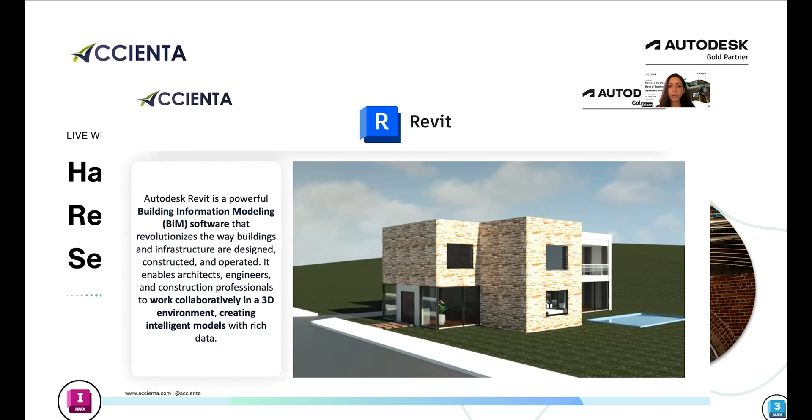On the right, we can see a render taken from the Revit software. We can see that the render communicates clearly what materials have been used, and it communicates the whole model in a clear vision. However, if we go next, please.

So it's a real-time visualization software. Let's wrap it all up. The purpose of Revit is to create basic renders, plans, and models, and Twinmotion is only for the visualization part.

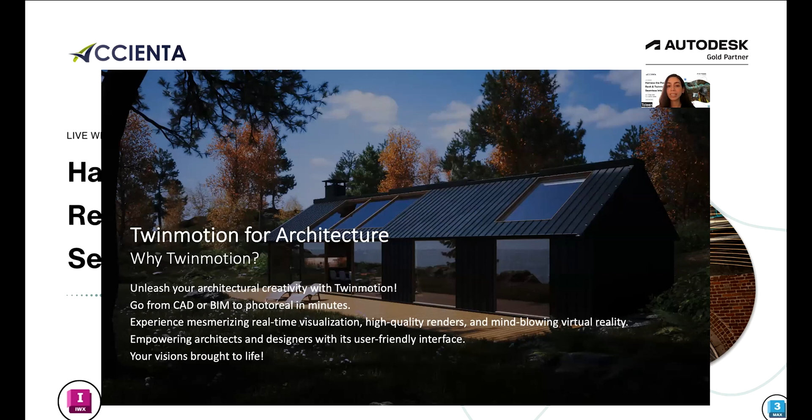So why use Twinmotion? You can go from CAD or BIM to photoreal in minutes. With Twinmotion, you can clearly communicate your ideas, respond to feedback on the fly, and enable every stakeholder to experience your design's full potential before a single brick is laid.

After that being said, let's put it into more simple words. Basically, why use Twinmotion? You can aggregate, iterate, communicate, and then you can bring your scene to life, put it all in context so you can share your vision.

So how can we aggregate, iterate, communicate? We can aggregate data because Twinmotion seamlessly integrates Revit's architectural and structural data, enabling comprehensive visualization. We can iterate seamlessly because real-time changes in Revit instantly appear in Twinmotion, supporting efficient design iterations. And it's not a two-way change process. Whatever you change in Revit is automatically changed in Twinmotion, but the opposite is not correct.

And lastly, effective communication. You can communicate effectively through instant visualization because it enhances collaboration and communicates design intent effectively.

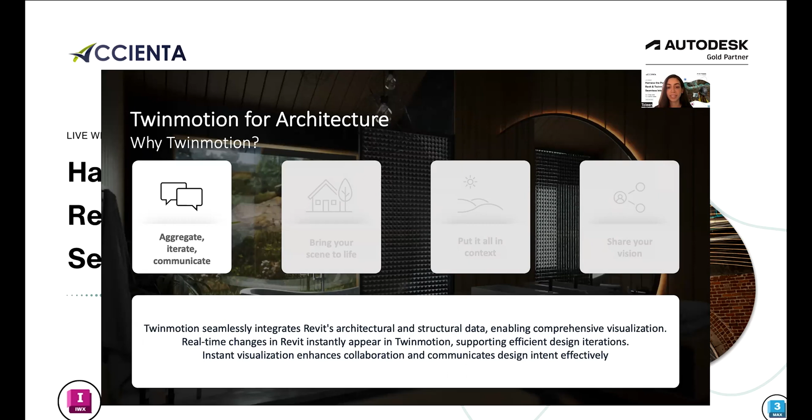Now, how can we bring our scenes to life? You can bring your scenes to life through realistic environments because Twinmotion's advanced rendering capabilities transform your Revit models into real-life scenes with accurate lighting, material, and environmental effects. You could also add animated elements such as animated people, vehicles, and nature to create dynamic scenes that illustrate your design in action.

And lastly, immersive walkthroughs. You can navigate your design as if you were physically present, providing a tangible sense of space and functionality.

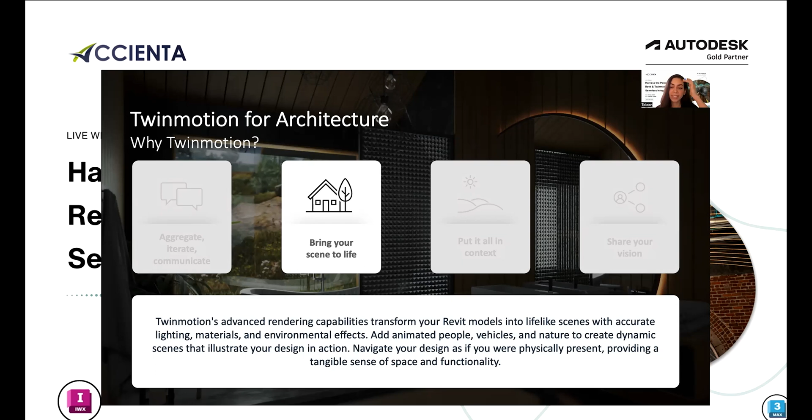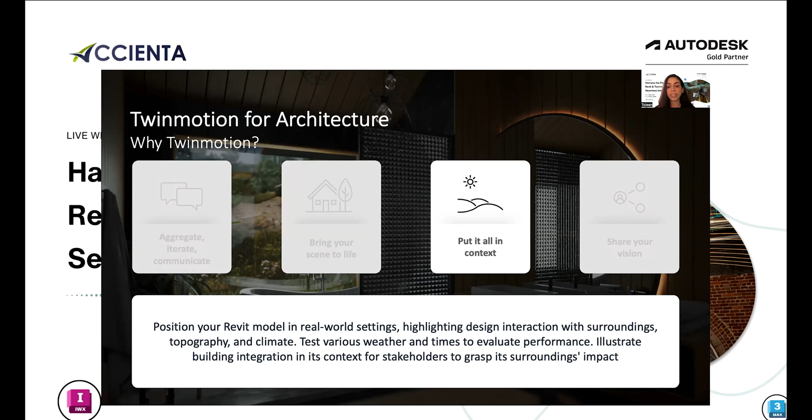Now, after that, we brought our scene to life. We can put it all in context. How can we do that? We can do that through putting our model in the environmental context. You can position your Revit model in a real-world setting, highlighting design interaction with the surroundings, topography, and climate as well. You can also test various weather and times to evaluate performance. And lastly, site integration. You can illustrate building integration in its context for stakeholders to grasp its surroundings' impact.

After doing all of that, we are ready to share our vision through compelling presentations, using our storytelling tools, and making an interactive experience. So basically, you can use Twinmotion for engaging presentations and animations to captivate clients and stakeholders, guide viewers through design features and innovations, and enable real-time interaction for deeper understanding and valuable feedback.

Now, just a quick overview. This is a more summarized key features. So basically we can aggregate data, iterate seamlessly, communicate effectively, create realistic environments, add animated elements, enable immersive walkthroughs, establish environmental context, simulate weather and time, achieve site integration, deliver compelling presentations with storytelling tools, and provide interactive experience.

And this is not everything. There are way more options in Twinmotion.

So basically, Twinmotion offers one-click synchronization with various software, and you have the ability to import entire scenes from various software as well in a new Datasmith format. You could also bring in data from virtually all 3D content creation programs with support for importing many extensions such as SKP, 3DS, and so on.

You can import point cloud data. You can have different outputs such as panoramas, standard, or 360 VR videos, which is really important for our times today. And lastly, different platforms and software inputs.

Now, what is the relationship between the AEC collection and Twinmotion? So there's a direct link between Revit and Twinmotion. And as we all know, there's a direct link between FormIt Pro and Revit.

But that's not the only software that has a direct link or has a link with Twinmotion. You can link your InfraWorks, your 3DS Max, and Navisworks by importing them or extracting them as an FBX extension, and that's how you can link it to Twinmotion.

How about AutoCAD, Civil 3D, and other software? You can save them as DWG and various other extensions, and then import them into Navisworks. Navisworks can be saved as FBX as well and imported into Twinmotion.

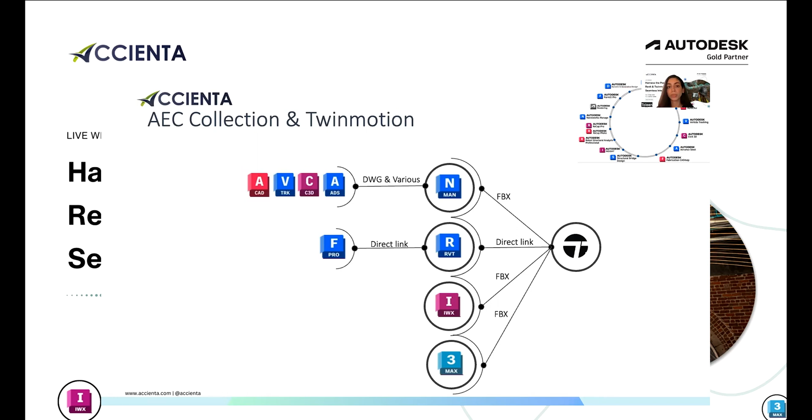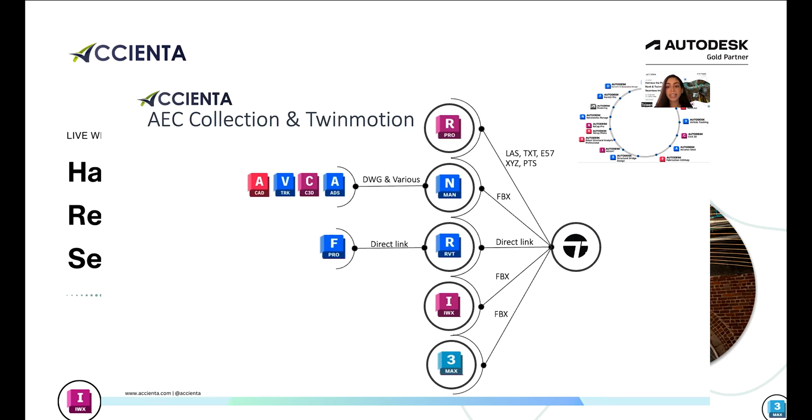Lastly is Recap Pro. Recap Pro can be saved as LAS, TXT, and many more extensions that can be imported to Twinmotion as well.

So let's take everything in. Don't be overwhelmed with the information. We will show you through the technical demo how you can easily achieve a realistic, stunning model.

I created this model myself from scratch, so we can work together to understand how we can link our Revit model to Twinmotion, how we can make this model more realistic, how we can add more details, and so on. So for the first video, we're going to learn how to link our Revit model to Twinmotion and what AutoSync is. Can you start the video?

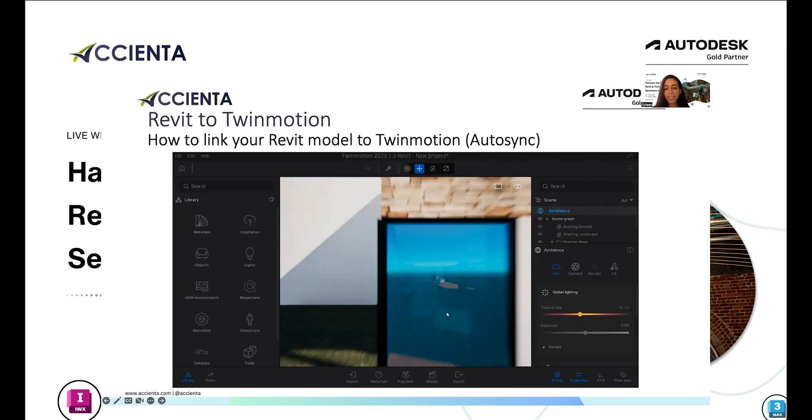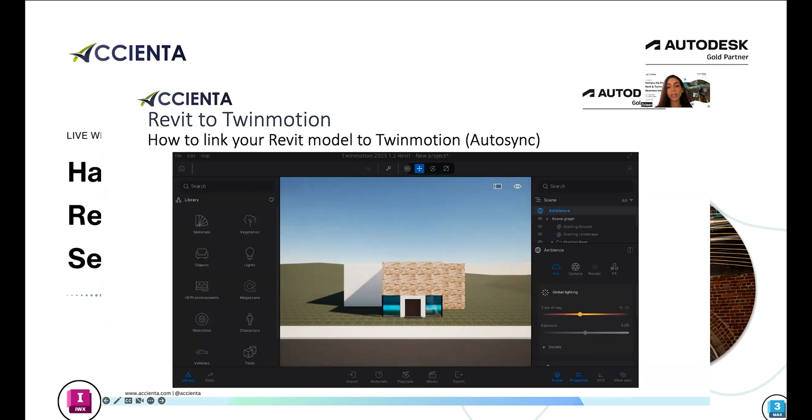So I'm pretty sure you're now saying that it's not realistic yet. You can see here the surroundings, the interiors, the exteriors, everything. We still don't feel that it's realistic enough. That's fine. The more details we put, the more elements we put, the more realistic it will look. So now that's how it looks when we firstly import it into Twinmotion. We can change it together so it could look more realistic. Next, please.

Great. Now, what is the difference between Revit and Twinmotion, such as the trees? As I told you before, there's this button called AutoSync. Whenever you change anything in Revit, it's automatically added to Twinmotion. And whatever you change in Twinmotion is not changed in Revit. It's not a two-way change process.

So what we're going to do now is add a tree in Revit, and let's see how it looks in Twinmotion, and how we can change that to put a tree from Twinmotion itself to give it a more realistic look. Now, here we're going to navigate between the two windows. The window of Revit is on the left and the window of Twinmotion is on the right. Can you start the video, please?

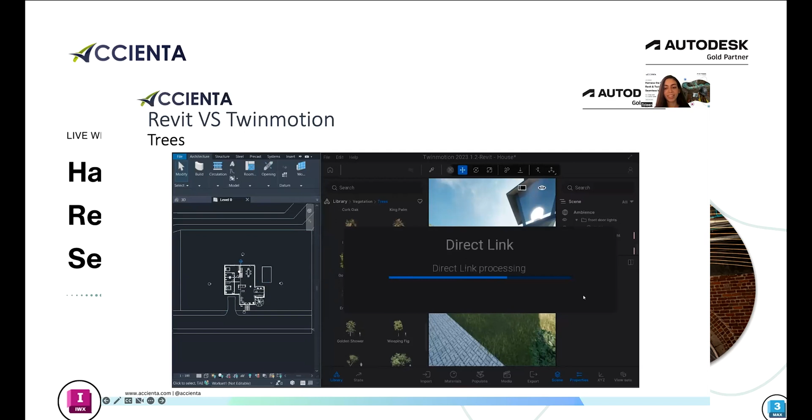So I'm just going to go to Revit, add a component, which is the tree, and add it right there. After that, I'm going to go to Twinmotion, and let's see the magic happen. It's going to be automatically added, and we can see how harsh and unrealistic the tree looks. What we're going to do is just right-click, and then replace it. Choose from any tree you'd like and just drop it in the box, and you can start the replacement. And just like that, you have yourself a more realistic tree. Next, please.

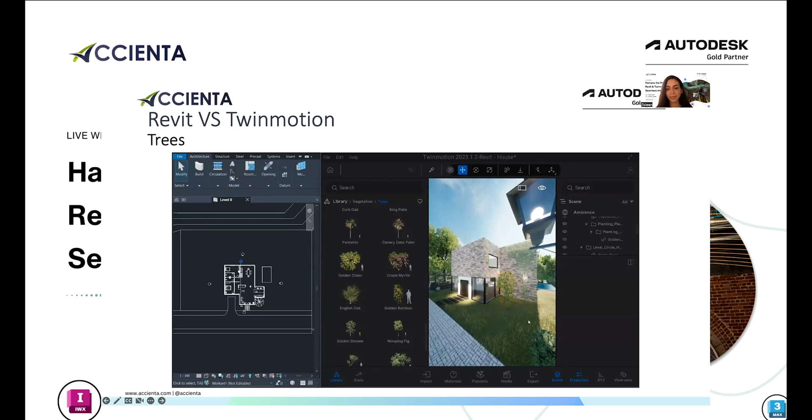Now, after seeing how we can import our Revit model into Twinmotion, let's see how we can make it more realistic. So for now, the exterior is imported directly from Revit. It's stone. Now, I'm going to zoom in and zoom out just to show you the differences between the materials in Revit and in Twinmotion, and how it differs in extrusion, roughness, and so on. So now we're going to learn how to customize the materials, the colors, and what the material picker is. Start, please.

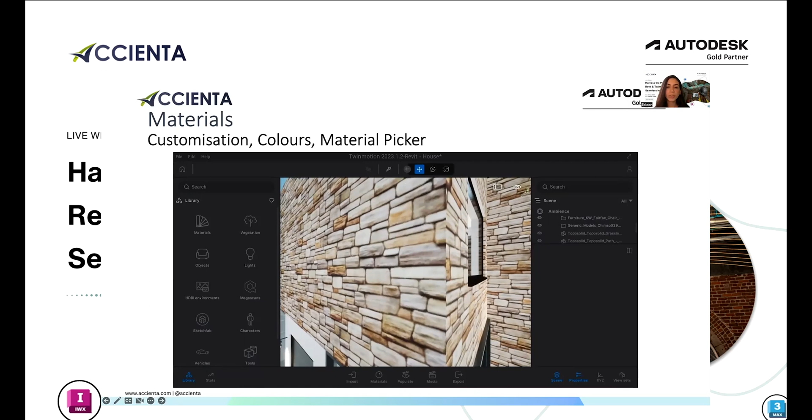So I'm zooming in. You can see now that there is no extrusion, no roughness. You can see that it's a flat picture. We can't see more than that. Let's change it. So on the left, we have our library. I'm just going to go to materials. You have glass, metal, wood, brick. You can choose from whatever you want. I'm going to stick with stone.

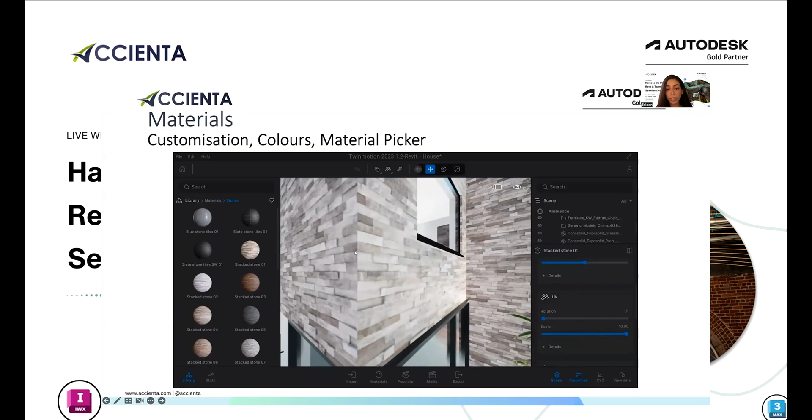Now, Twinmotion has more than one library. You can choose from these on the left, and you can see all the swatches here. On the right, you can change the scale, the roughness. I'm just going to scroll a bit more and choose what I like better. I'm going to stick with this one, and then we're going to zoom in. You can see that the material has its own shadows, the roughness, and you can see all of the extrusions as realistic as it is.

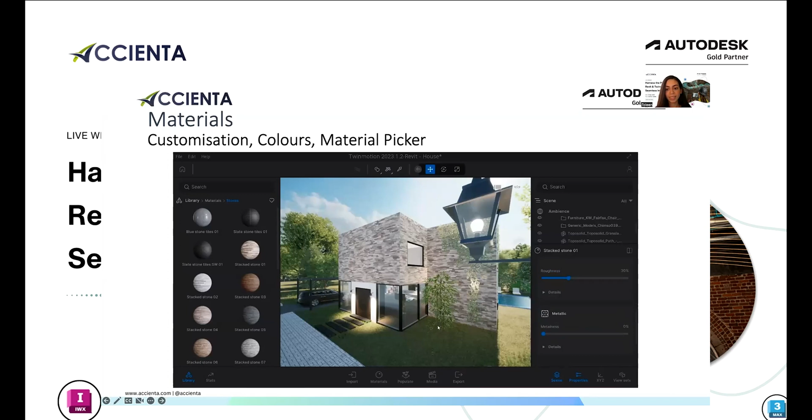You can change also the metallic feature of it. You can make it more reflective. It's fully customizable to your own needs and desires.

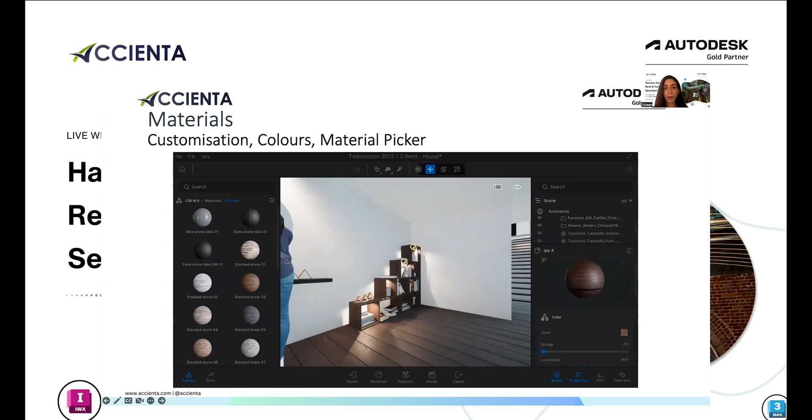As simple as that. So as I was telling you earlier, Twinmotion has more than one library, more than one extension. I'm going to show you that in a bit. So let's move to the next video.

Now, on the left, you can see the library. We have also Megascans and Sketchfab. What are these? These are other libraries that Twinmotion acquired earlier. There are more options for you. If you'd like, you can just use the library that Twinmotion has, or you can use Megascans and Sketchfab.

So what we're going to do here is learn about object dropping, vegetation, how you can change the age, scatter, people, plus path. What are these? Let's learn more. So now let's start the video.

I have my camera positioned in the street, and now I'm going to add a tree from library, vegetation, trees. You can see all the swatches here, illustrating the age difference and the size. You can choose from whatever tree you'd like and just throw it wherever you want.

So I'm just going to change the camera a little bit so we can see how we can change it. We have our tree right here. You can move it from the icon that is there. And I'm changing the age, making it younger, older. And of course, the size differs with the age.

And something really cool is that you can change the season as well. If you'd like, you can keep it automatic, so when you change the whole season, it changes with it. You can choose from the options: autumn, winter, of course the leaves are lost in winter, or you can simply change the tint of the leaves. Here, I'm just going to pick a color, a more orangey color, let's say.

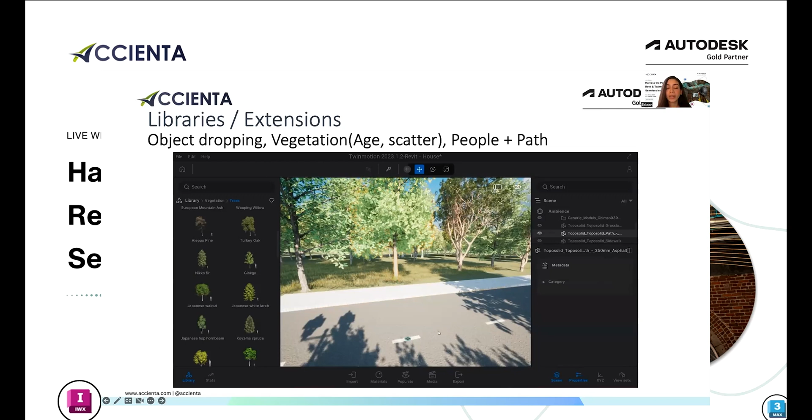And just like that, we have our tree ready, but I'm just going to get it back to its original color. As simple as that, you had your tree, it's in the right place, and then let's add some other objects.

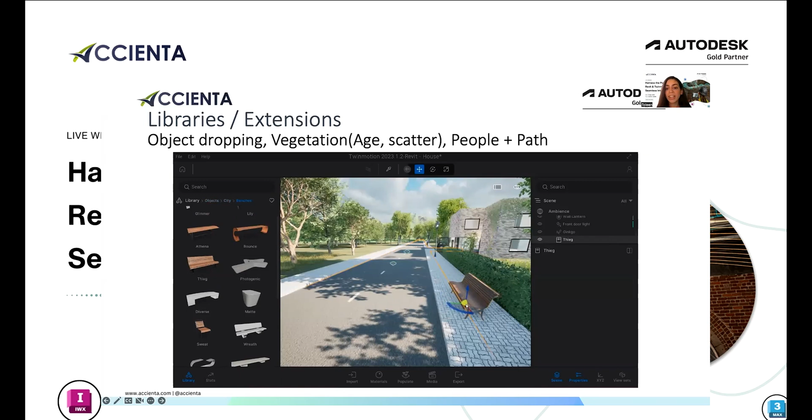So now I'm going to add a bench to make this street more realistic. From objects, city, benches, and you have your bench ready. I'm just going to choose from one of these, see the options, and just throw it in. And you can change it, change the position from the icon there. I'm going to add a little bit more elements so it looks more realistic.

Now, as you can see, the library is separated in a matter that you can easily navigate between the features and so on.

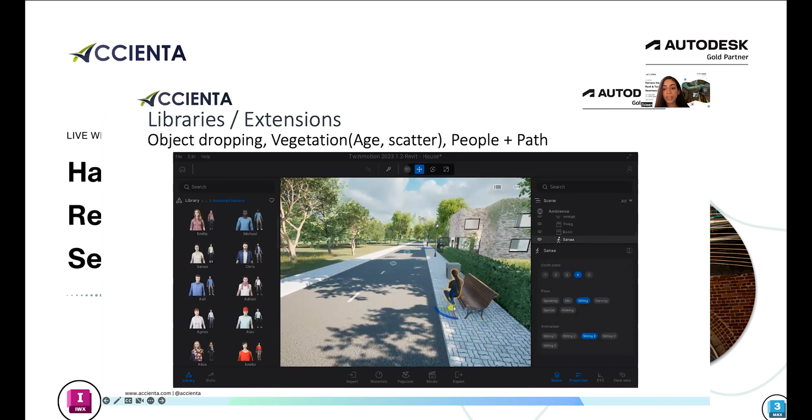So now I'm going to add my person. You can add an animated person or a posing person. I'm just going to choose this lady right here. And something really cool as well is that you can change her clothing, you can change her pose: sitting, dancing, walking, and there's also more than one sitting position as well.

So just like that, we have our animated person, our bench, and many other elements. So what we're going to do now is add some pedestrians and vehicles as well.

It's really simple. From populate, you just go to path, character, and then just press on the starting point and on the end point. And just like that, you have your pedestrians.

Now, you can choose whether you want them dressed as if they're in an office, or traveling, or on the beach, however you want. You can change the width of the path, the density, if you want more or less people, and as I told you, the clothing.

It's really interactive and fun to work with as well. I'm just going to leave it as the street.

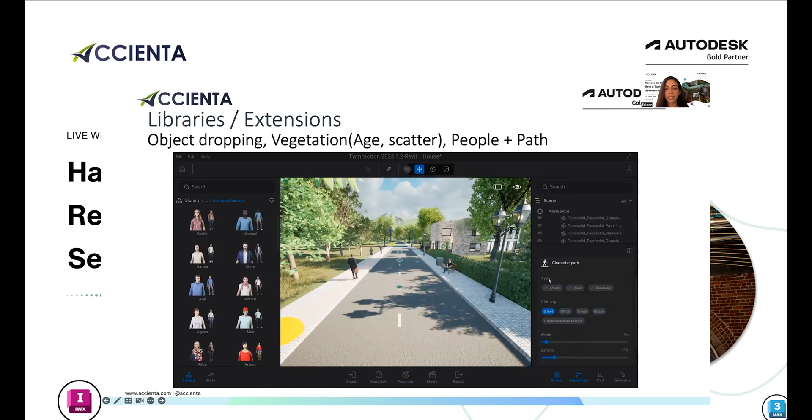Now let's add our vehicles. Again, from populate, vehicles, add the starting point, the end point, and you're good to go. So it's really simple to add all of these paths and all of these vehicles and so on.

Here we can change the lane count if you want it to be more than one, or if you want it to be a two-way direction, you can do that. Now you can change the lane count, but it's way too much for my street right here. So I'm just going to keep it one, and turn off the two-way direction because I want to customize it the way that I want.

And of course, you can change the density, the speed. It's a residential area, so we're just going to stick with slower cars. And I'm just going to do the same thing on the other side.

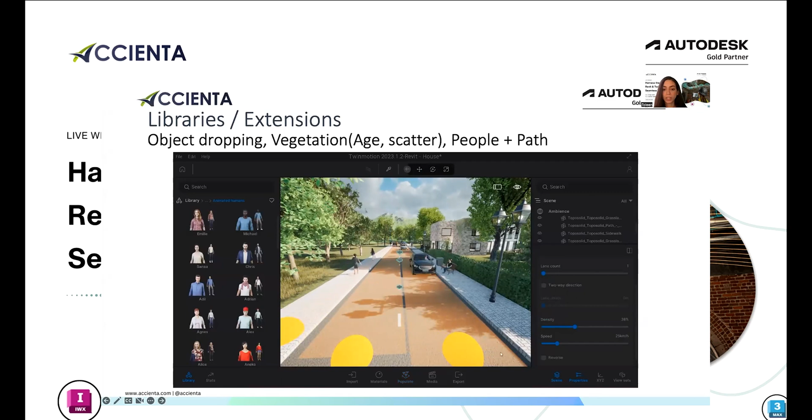And you can do this or just simply press on a two-way direction. So as simple as that, you can change the density, the speed as well. You have your street ready for your model.

That's it. I'm just going to change the perspective a little bit so you can see it from all perspectives. We can move around, and you can see how it looks from the top, from the sides. That's a very, very cool feature, actually.

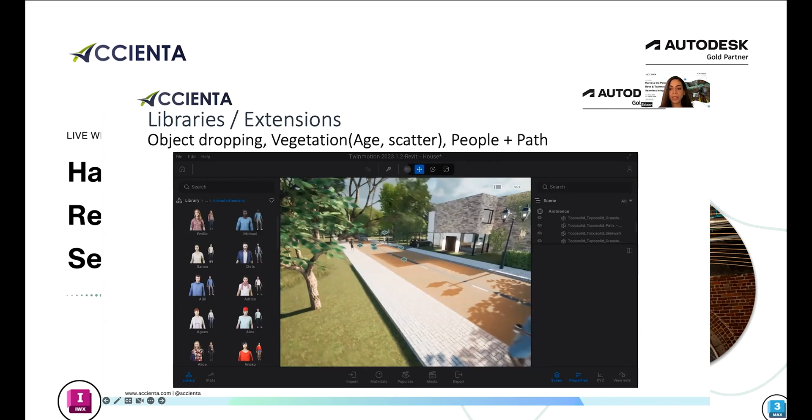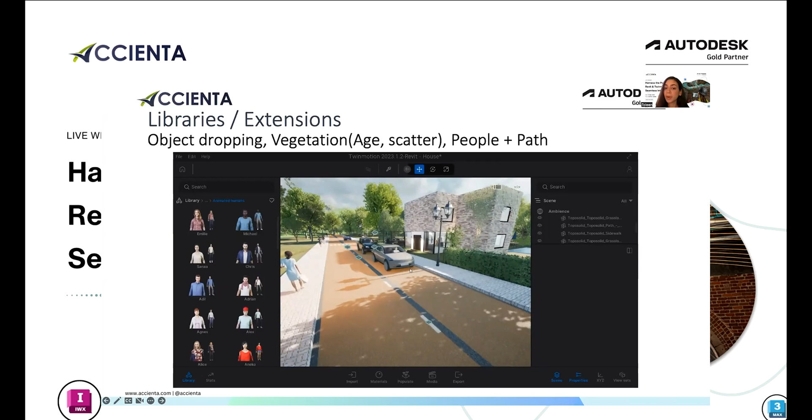So after that, we're done with that. We learned about the libraries, the extensions, how can we drop an object, the vegetation, the paths. Let's move on. Next, please.

Now we're going to talk about how you can touch up your render. We all know that lighting brings your scene to life, and one of the most important features in Twinmotion is the lighting. You can customize it as much as you want and so on.

So here I chose that let's build a bedroom together. Now it will be an empty room, and we're going to put all of the elements inside to make it look as realistic, as homey, as relatable as possible. So now we're going to create this bedroom and add the lighting to it and see how the lighting makes your room differ and more lively.

Let's start the video. I'm just going to enter the room. Now it's an empty room. We can see a window over there. I'm just looking around, and I'm going to add my bed first.

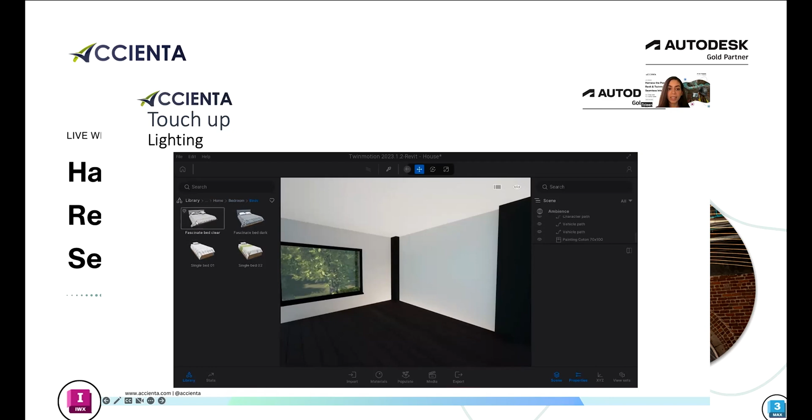First we go to library, objects, home, bedroom, and choose a bed from these. Or you can simply type in a bed and you'll get more options from the other libraries as well. I'm just going to stick with this one.

And if you don't like the blanket or any element from the object that you have, it's fine, you can change that. So I'm going to change it from materials, go down to fabrics and just look around. You can see the swatches, it makes your life easier.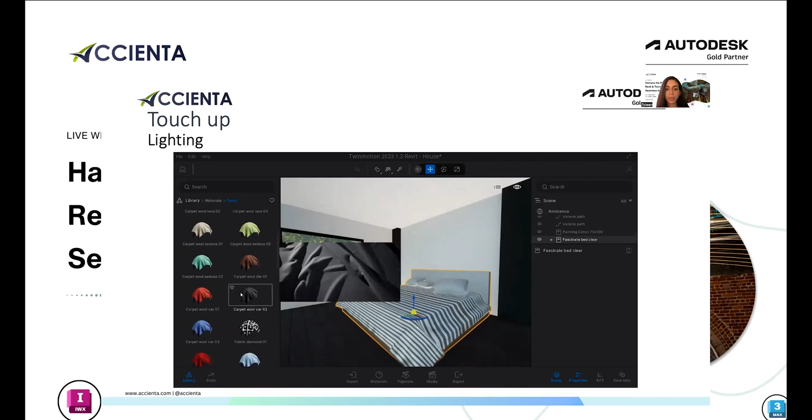So let's try putting a black blanket and just changing the color of it. You can make it darker, lighter. And there it is. Or you can simply just add a pre-made material.

And you could also change other elements from the object itself. So here I'm just changing the pillow colors, all of the pillows. You can also change the wood, and you can change anything in the objects that you have chosen.

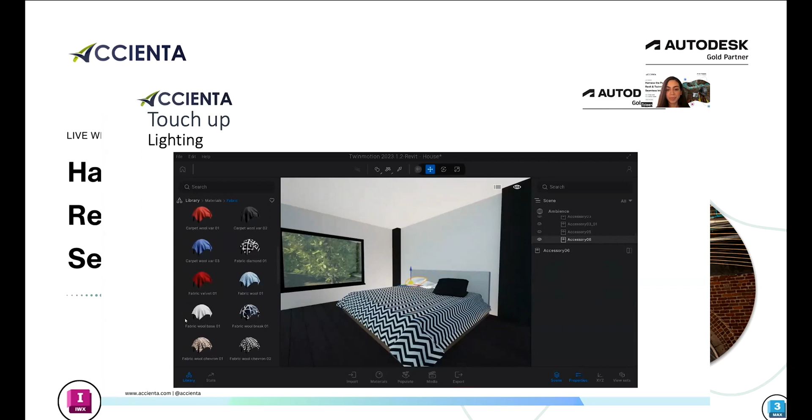After that I'm done, I'm just going to add a little storage area, a little wardrobe. I'm going to go back to library, objects, home, bedroom, and just choose a wardrobe.

Now here I'm going to zoom in. I want to show you the level of details. So this is an actual phone, and also you can see the reflections of the glass. It's really cool.

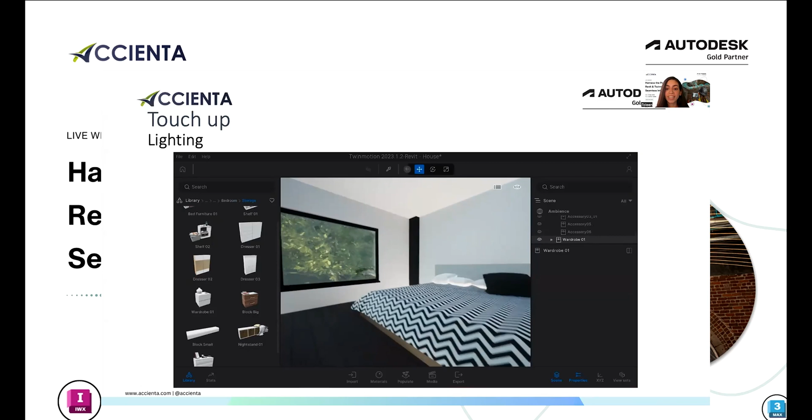Now I'm going to add a lighting fixture. I'm just going to go to Home, Living Room, Lamps, and choose one of the lighting fixtures. You can rotate it, move it, until you're pleased with it.

Afterwards, I'm going to add a mirror. I'm just going to look around to make sure everything's okay, and then add a mirror. So now you can type in mirror, you will have more options if you type it in, or you can just simply navigate through the library itself. I'm going to choose one of the mirrors and change the dimensions of it.

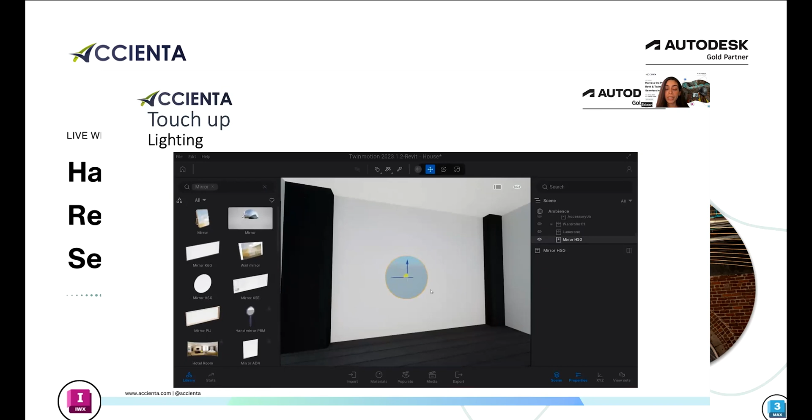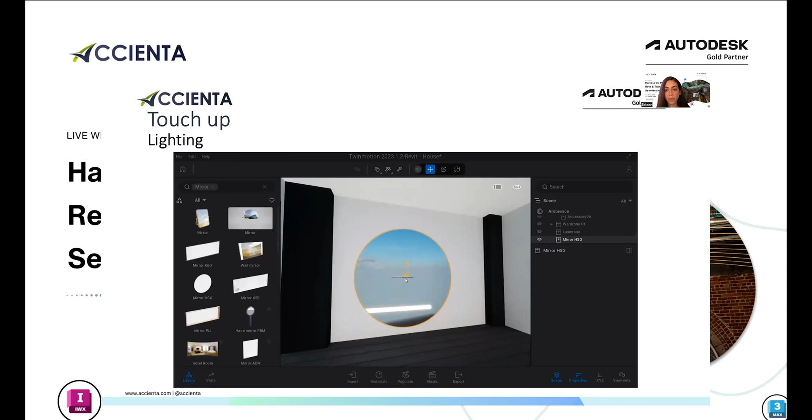What you can do is press on the scale to change the height, the width, or simply make it larger or smaller without changing the actual parameters of the object. I'm just going to move it around and keep it in the middle.

Now I want to add my lighting to make the room more lively, more relatable, more realistic. So we're going to go from library, lights, and choose any lighting you want. I'm going to add an omnidirectional light, go with this one, and just drop it. You can move it around and customize it to your own needs.

You can change the intensity, how far the lighting can go, and the temperature of the light. You can make it colder, warmer, and change the color of it as well.

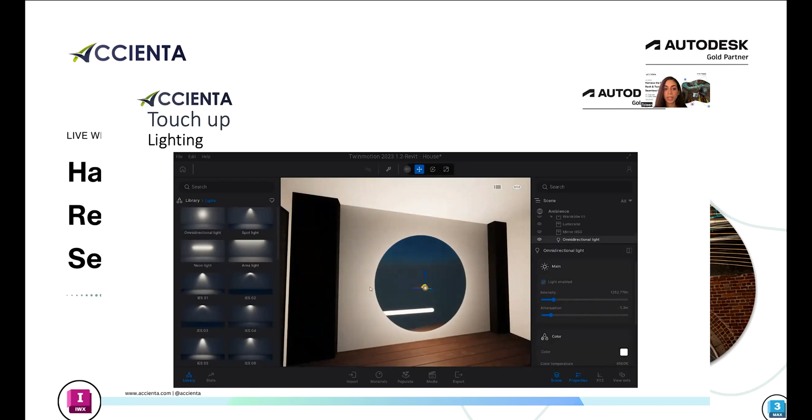After you're pleased with the light, you can move on to add another element. I'm going to add another light to my lighting fixture. You can see it's starting to look more realistic just by adding the lighting. I'm going to add this one, move it around, and put it in the middle of your object so it looks as realistic as possible.

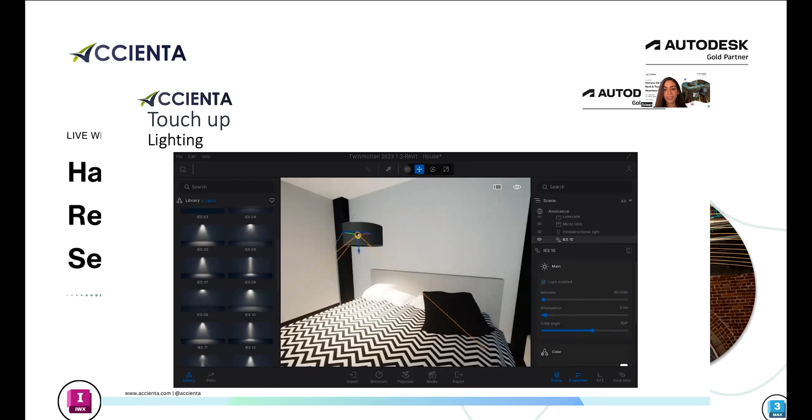As I told you before, we can change the intensity, how far it goes, and the cone angle as well, until you're pleased with it. So I'm just going to look around and show you how amazing the light can change the room.

Now let's add a little bit of plants. If you want outdoorsy plants, go to vegetation. From home, living room, plants, you can find the indoor ones. You can simply type in plant, or look for it in the library itself.

So I'm just going to add a couple here. You can see how the plant is reflected from the mirror, which is also really cool.

Just to finish up this bedroom, I'm going to add a little bit of decoration. Let's look around and see what's missing. We can add the decoration or the frame on this wall. I'm going to go to living room, decorations, and that's it.

Within a few minutes, you have yourself a very realistic room, a very homey bedroom, and you're good to go. It literally took just 5 minutes, and we have this beautiful bedroom over here. Of course, the more elements and details you put into your model, the more realistic it will look. So let's move on.

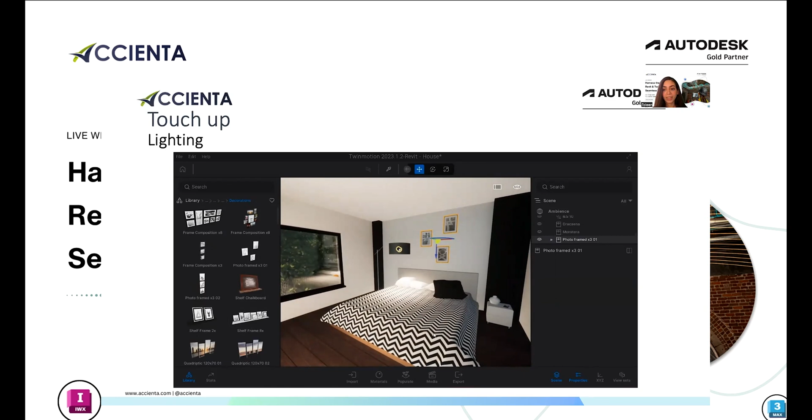Now, lastly, I want to talk about the output. What are the scenes? How can we render? How can we change the weather, the time of day, the background? When we're done, I'm going to show you a walkthrough of the whole project, the whole model, so you can see the level of detailing and how realistic it looks.

So here we can see that I have a perspective of the pool. Now, Twinmotion is more of a camera. You can play with the focal length, play with the perspective, orbit around, and look around. So you can choose whatever perspective or view you like.

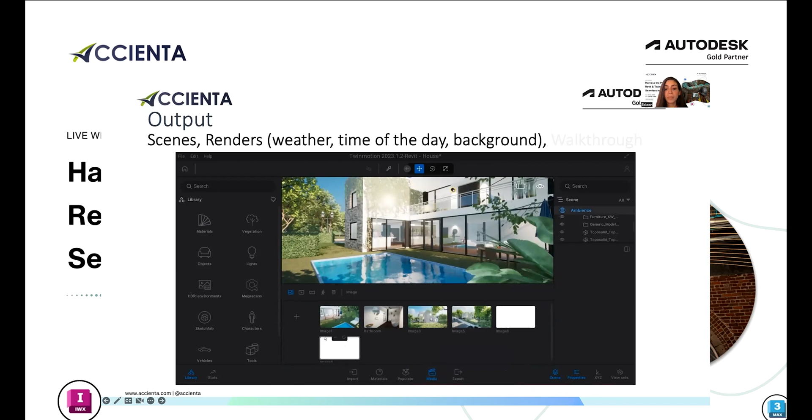Now, what I'm going to do is move a little bit until I like the view of it. And I'm going to go to media. Now, how do you render? You go to media and take a shot.

Now, here I have shots that have been taken before. They're considered as views, as saved views, just as in Revit. And you can change it around from the right.

So basically, you can change the weather. Now, this is sunny weather. I'm going to make it a little bit rainy. You can see how cool it is because even the ground is wet. Everything is changing with the weather itself.

And now I'm going to change the season. So now it's summery. Now it's autumn. You can see how the leaves are changing as well, the vegetation. Everything is subjected to the season.

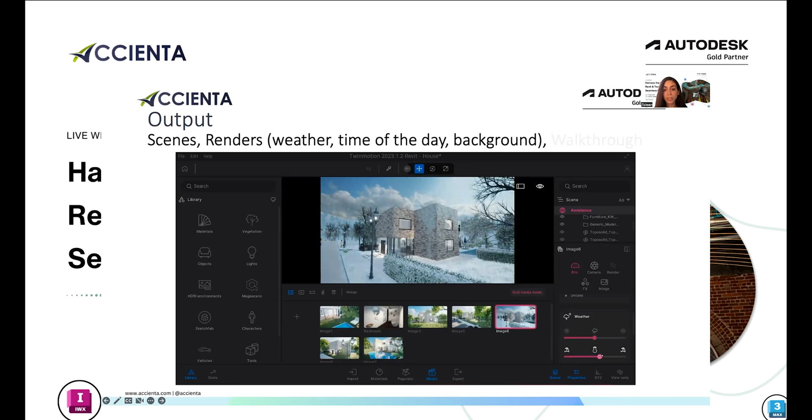Back to summer, back to sunny. Now you can change more than this, these functions.

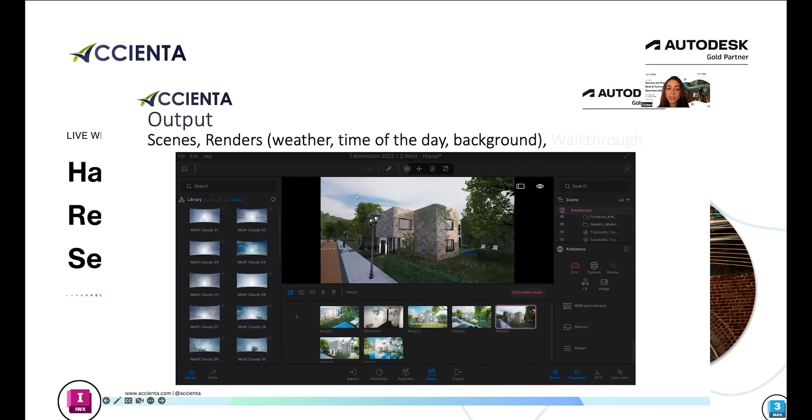Now there's an HDRI environment. What does that mean? It's basically you play with the whole shadowing. You can go choose whatever you want. I'm going to choose an approaching storm. You can see how the shadows change, how the lighting changed. Or you can just simply choose low sun, morning, afternoon, cloudy, clear, overcast. You can navigate through and choose your favorite. Now, look how the shadows changed.

Because I have an HDRI environment, that doesn't allow me to change the time of the day, but you can simply just turn it off, and now you can change the time of the day.

There is also a cool feature, which is the ocean. If your project was nearby an ocean, you can simply just click on that, and you have yourself an ocean for yourself. You can change the sun intensity, the sun size, the sun reflection as well.

And that's not everything. You can change much more than that. You can go to camera. You can change the exposure as well. Now, let's go to camera. What is camera? As I told you before, Twinmotion is more of a camera. So you can change the focal length, like 16 millimeters, 20 millimeters,

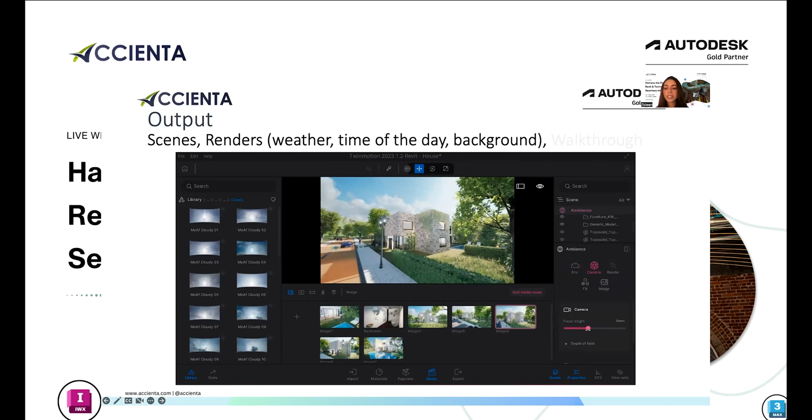Whatever suits you best. You can go to render. From render, you can choose the intensity of the shadows. If you want to make it lighter, darker, more intense, less intense, you can see the difference right here. You can color grade it, the saturation, the contrast, and finally, you can choose how you want to extract this image, the format of it, and the size, of course.

So that's basically it of how we can render the scenes. As simple as that. It's what's very nice about Twinmotion, that it's very user-friendly, it's very direct, it's very easy to use as well.

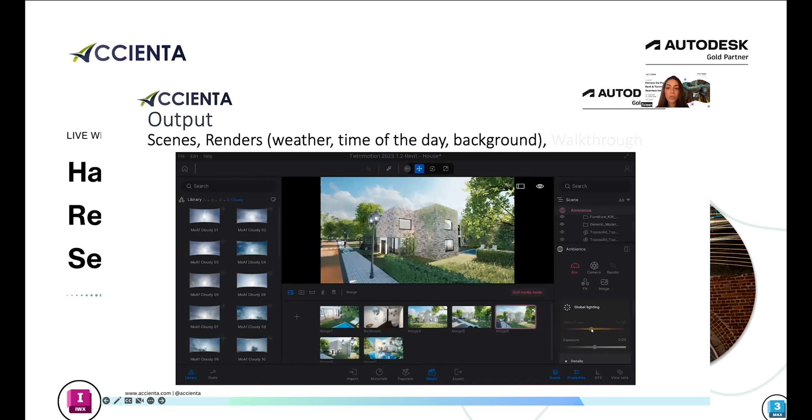Now, lastly, I want to show you the walkthrough. Through the walkthrough, you're going to see all of the elements. I'm going to change the times of the day. I'm going to change the weather as well. You can see how you can position your camera in certain positions, make your own perspectives, make your own video, and add your own elements. So let's start the video.

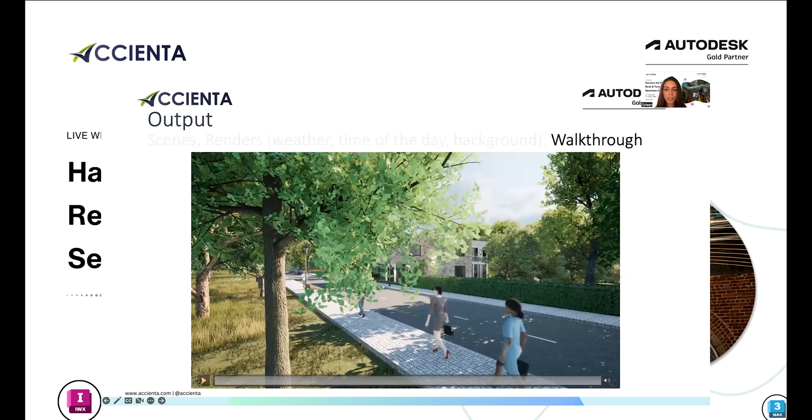You can see how we're moving around. I believe it's a little bit lagging because of the internet, but once you save it to your computer, none of that will happen.

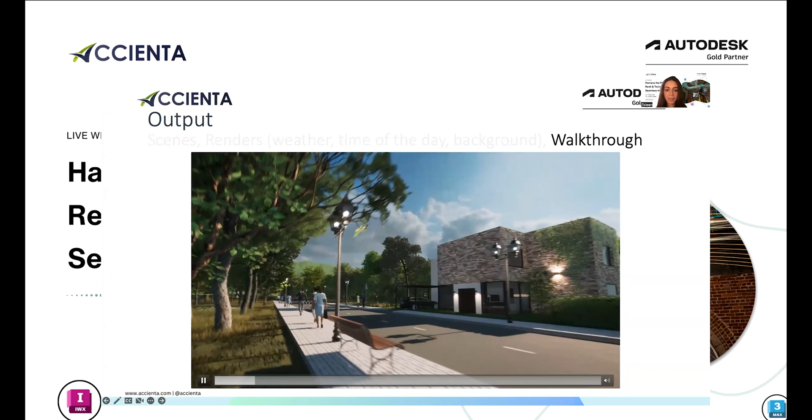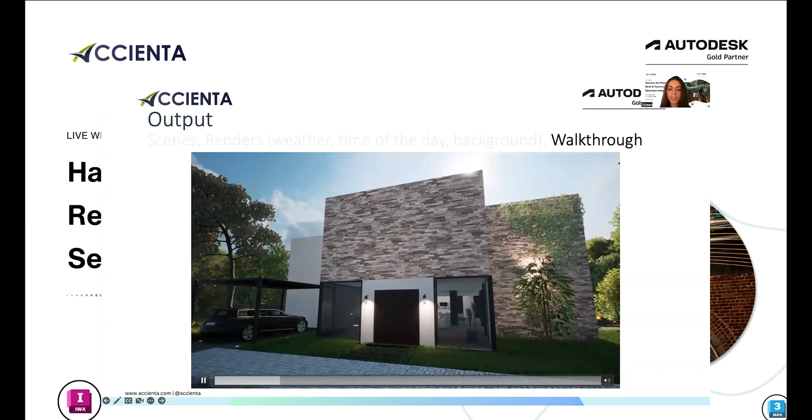So we can move around. Let's see the exterior of the house, the interior. You can see all of these elements on the street, the sidewalk, the little dash lines, the signs, the vegetation, the cars, the people moving, here the lighting.

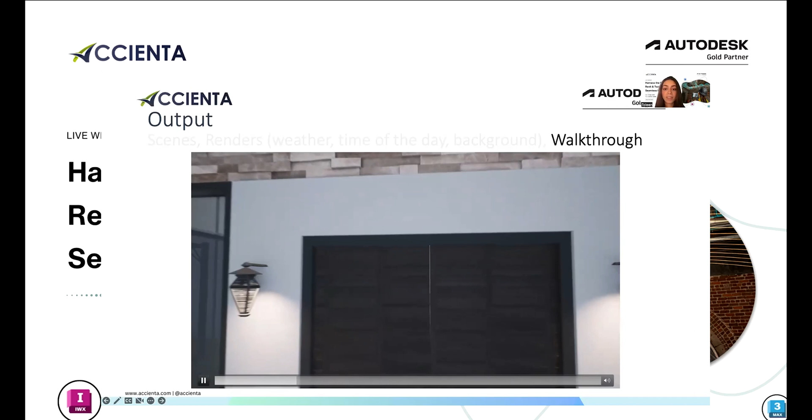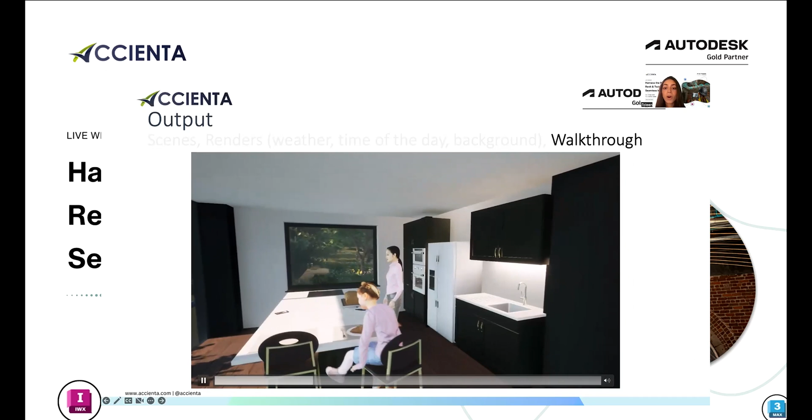And let's see also the interior of the house as well, the level of detailing that was put into Twinmotion. So here we're entering the house. We have our animated people, we have our kitchen. Now, all of these objects have been used from Twinmotion. I have changed the color of them, the materials, but we can see how wide the library is.

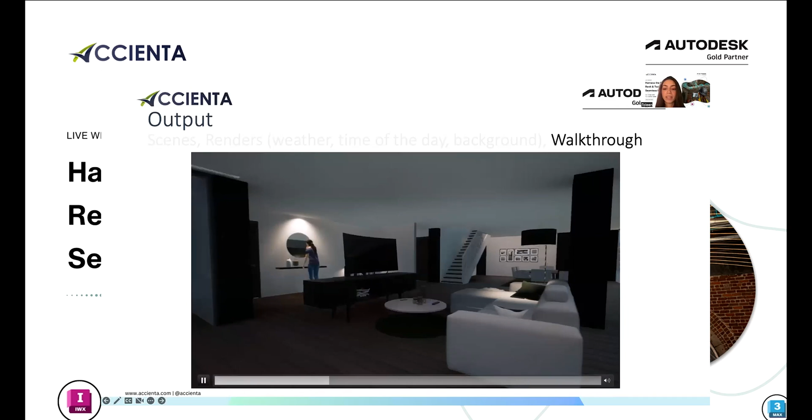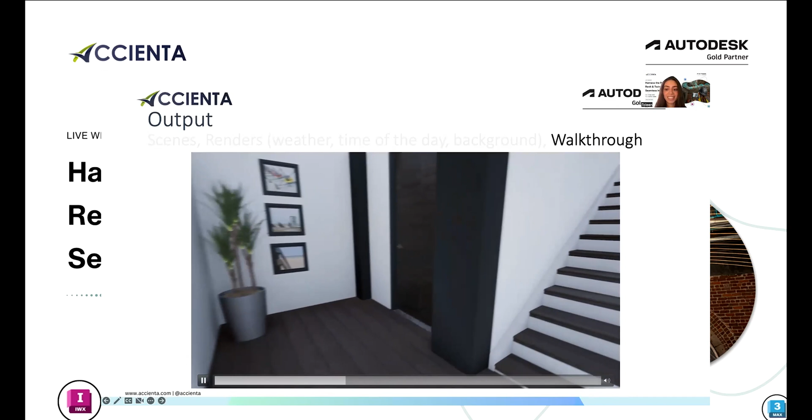You can look at the books as well. You can also see the papers in the books. That's how detailed it is. So let's enter one of the rooms. You can see the reflections from the mirror. Look how the lighting is changing as well. The bathroom.

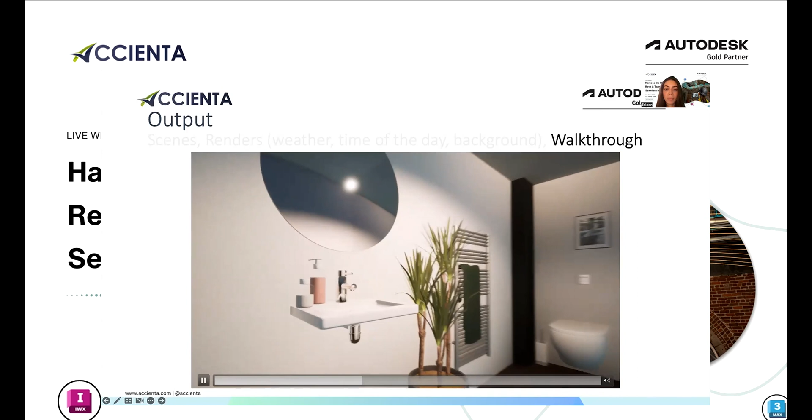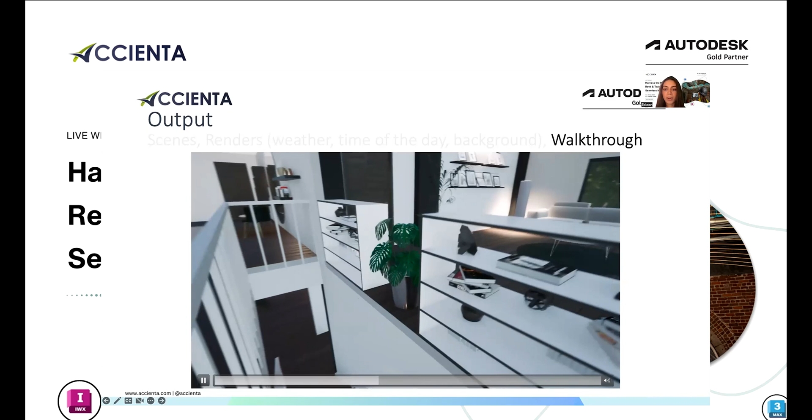Let's go upstairs. So upstairs, we have another living area. If you look at the shelves, we can see there's a lot of these small elements, small decorations. And here we have our lounging area. You can see the reflections as well.

Let's go outside and look from the balcony. Now, beneath is the pool area. We can see the vegetation, even the fruits on the trees as well. You can see the fire.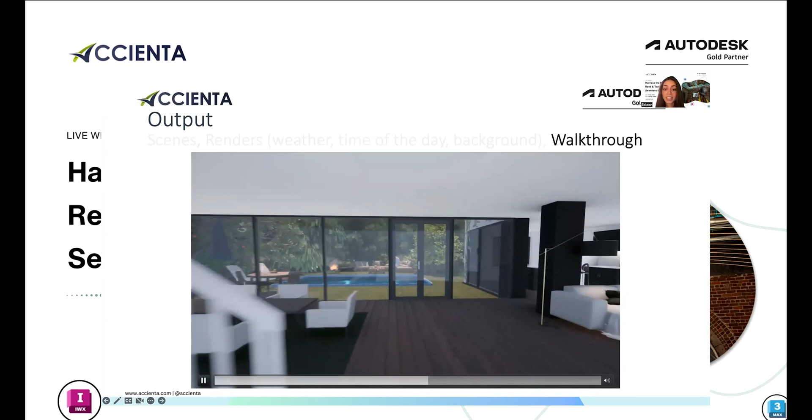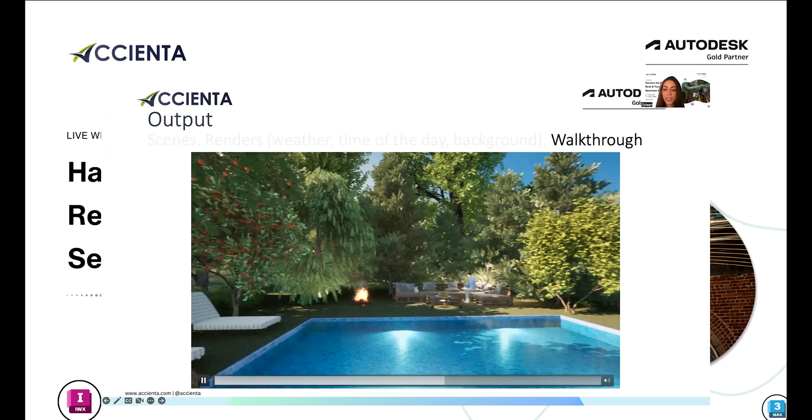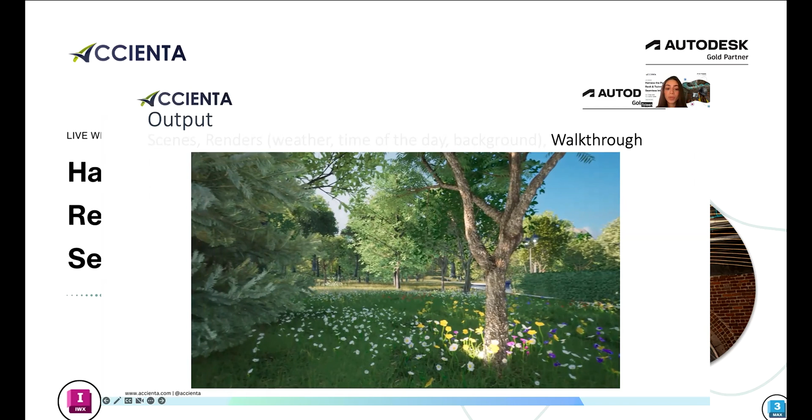Now let's go outside so we can see all of these elements again. The fire, the pool, you can see the reflections from the pool, the water material. We can see also the lighting inside of the pool as well, the fire. Now here I'm zooming in to the plants so you can see how the plants are moving with the air. That's how realistic it is. It's really cool. So let's zoom out and just look at it one last time from afar.

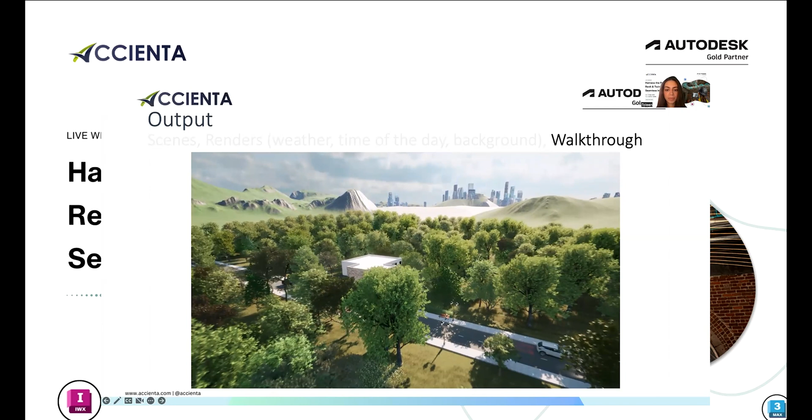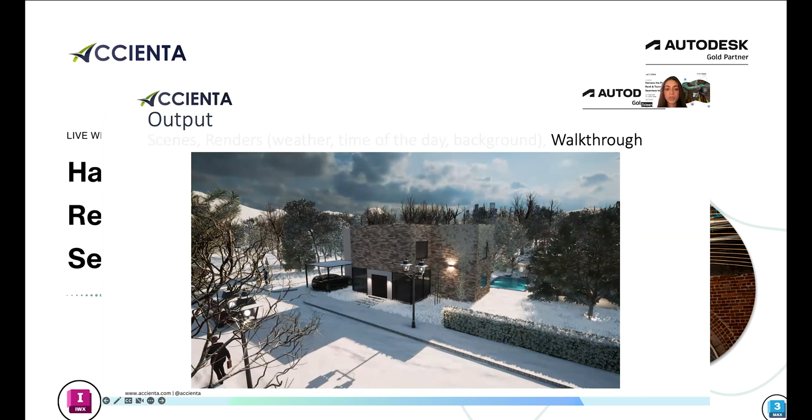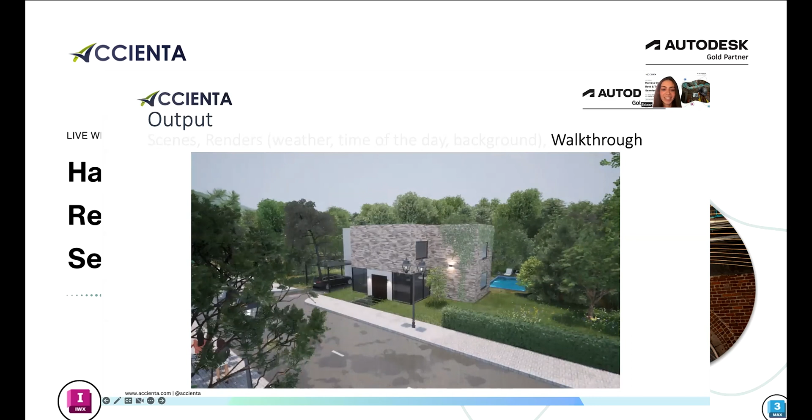Let's try to change the weather and the time of day, and see how the model interacts with all of these options. Now it changed from autumn to winter. It's snowing, then it's raining, and back to summer. And that's how you change the time of day.

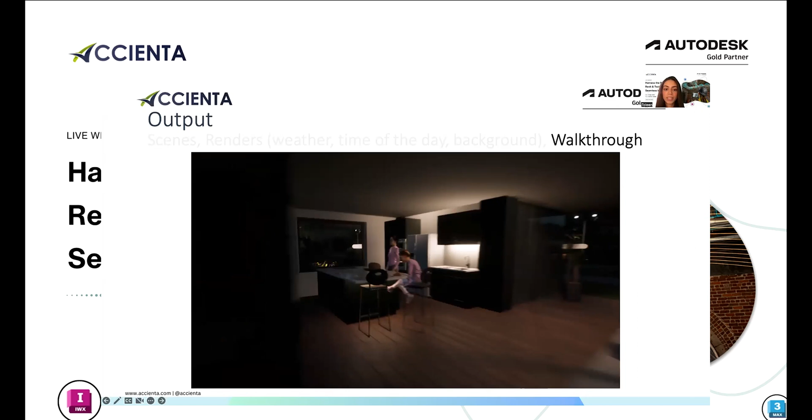You can see how the shadows are interacting with the sun, and your lighting is more clear right now. Let's move around—the lighting in the pool, inside of the house, the lounge area, the kitchen, the reception area as well.

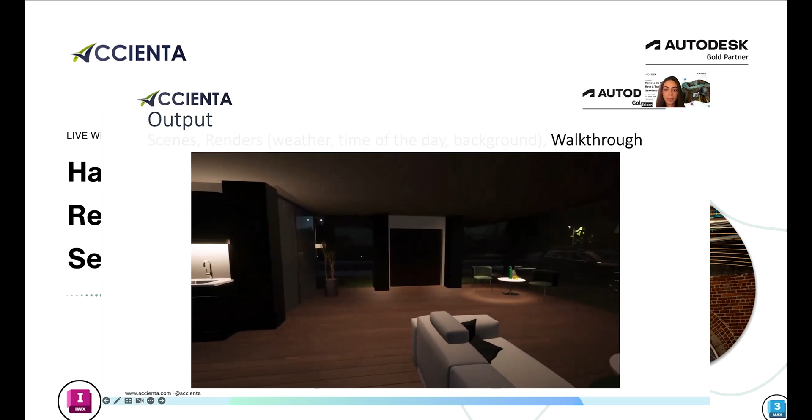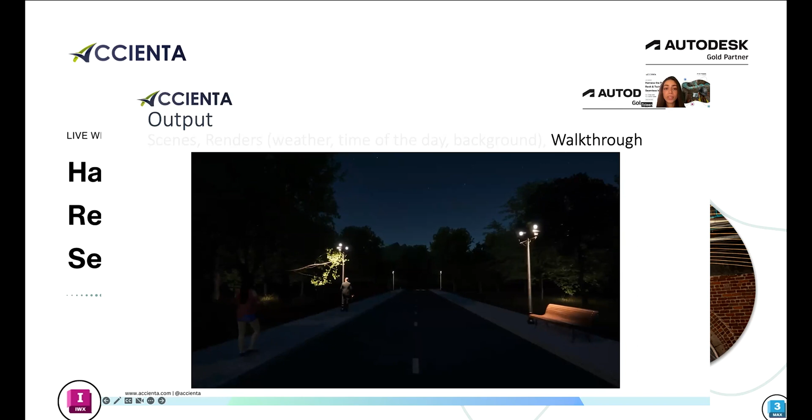You can also see the lights from the cars themselves. Let's walk a little bit through the street. You can see the stars in the sky, which is cool as well. Now let's go back to the morning—you can see the sunset, the sunrise.

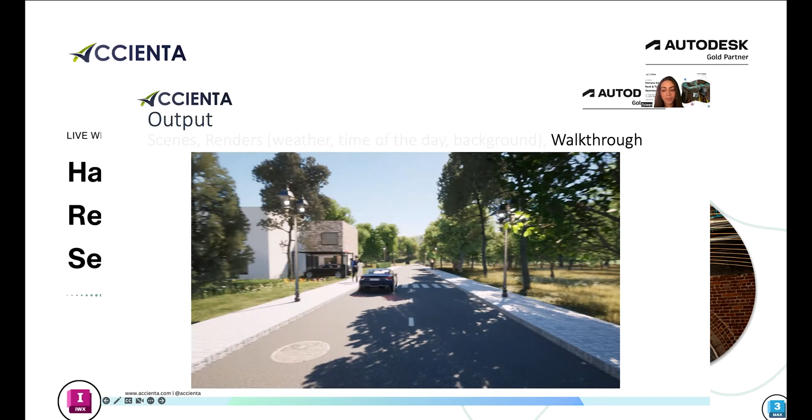And that's it, so that was our walkthrough for today. You can see how the shadows are interacting. With that, we have finalized our technical introduction and so on.

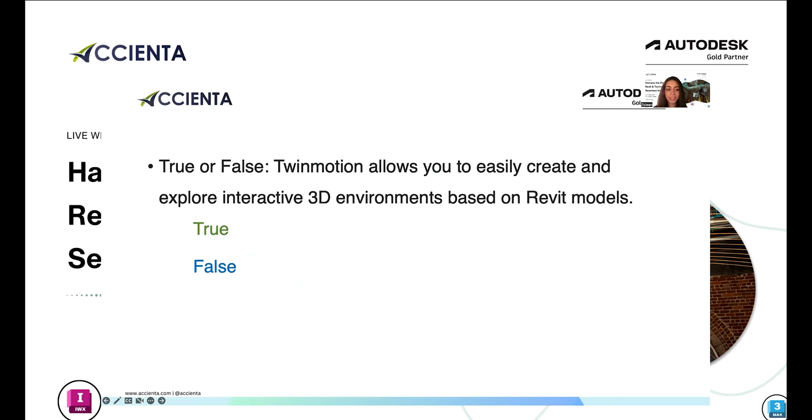On to the next question: which Revit elements can be synchronized with Twinmotion for visualization purposes? A, walls and floors. B, mechanical systems. C, plumbing fixtures. D, all of the above. Let's see your answers. D, all of the above, and it's correct—it's all of the above. Anything in Revit is automatically changed and delivered to Twinmotion, and of course you can change that from options in Revit. Next, please.